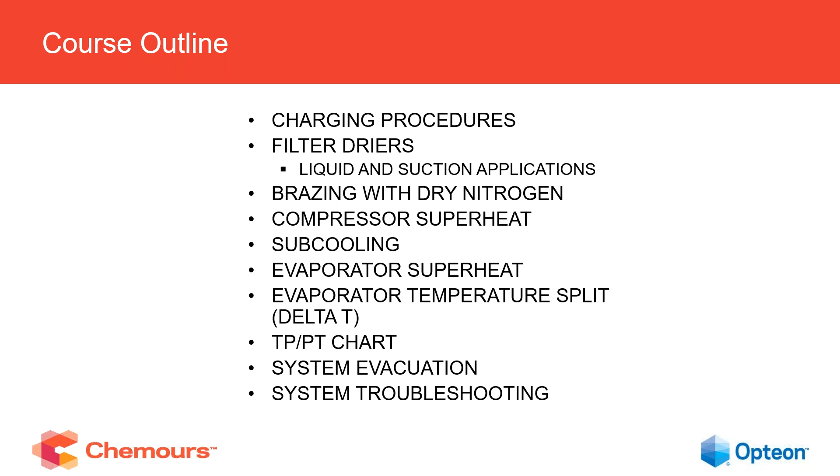So the new equipment, just like all new equipment, will come with a service manual. And it is critical that the technician understands the proper way to install this equipment, servicing some of the components, because they will be a little different than components that they're used to seeing in systems.

Most of these air conditioning systems will have sensors on them to sense the refrigerant, because it is an A2L refrigerant. They may or may not need PM, preventive maintenance, on those sensors—it will just depend on the equipment. They really need to understand the difference between an A2L refrigerant and an A1 refrigerant like 410A that they're used to using today.

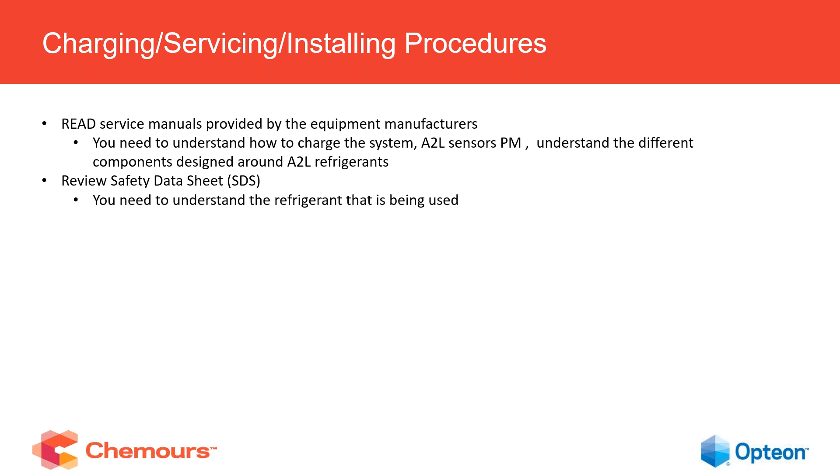They should always review the safety data sheet. Each chemical has a safety data sheet, so they need to review that. Luckily enough now, if they haven't reviewed a safety data sheet and they're used to an MSDS, safety data sheets are much easier to read today than the MSDS. They're all sectioned, each section is the same on each SDS now, so it's much easier to understand an SDS over an MSDS.

Just like any refrigerant, make sure there's proper ventilation, especially if they're working in confined spaces. A lot of these units will be in confined spaces, especially the air handler side. So never go into a confined space by yourself—always have a partner when you're working with any refrigerant, whether it be an A1 or an A2L refrigerant.

Recover the refrigerant in a properly rated and marked cylinder. The A2L refrigerants used in air conditioning applications will need 400 PSI cylinders, just like the 410A cylinder. Pressures are very close to 410A on the air conditioning side of the A2L refrigerants. So make sure they are properly marking the cylinder after recovery, what refrigerant they have recovered. That way there will be no mixing of refrigerants. You do not want to mix any refrigerants, especially an A2L into an A1 system.

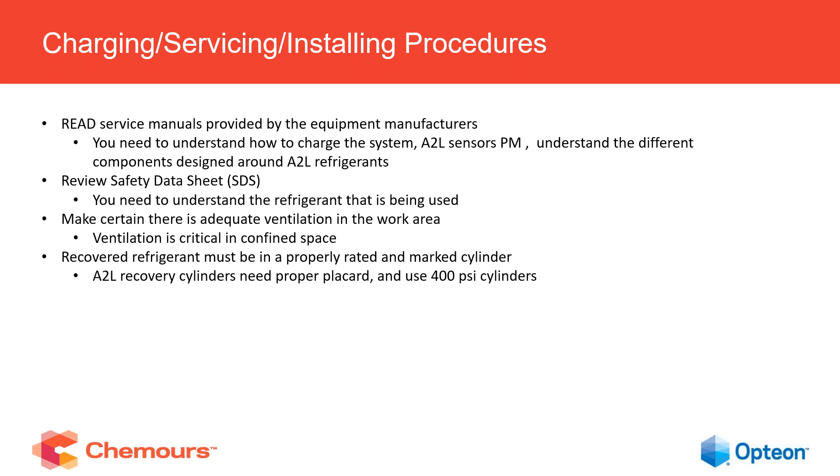Always purge with dry nitrogen. We'll be talking about dry nitrogen quite a bit. It will be in the instruction manual how the manufacturer wants that system to be brazed, but the technician will need to purge any component, any line set, anytime they put a torch on that system. They will have to have dry nitrogen flowing through the piping or component as they braze it in. This shouldn't be anything new—this should have been done with any other refrigerant. It displaces oxygen, it makes a lot better joint, and it's much safer.

If you notice a flame increase in size, color, that type of stuff, always turn the torch off, re-ventilate whatever you're brazing. Make sure all of that oxygen is displaced before you put the torch back on.

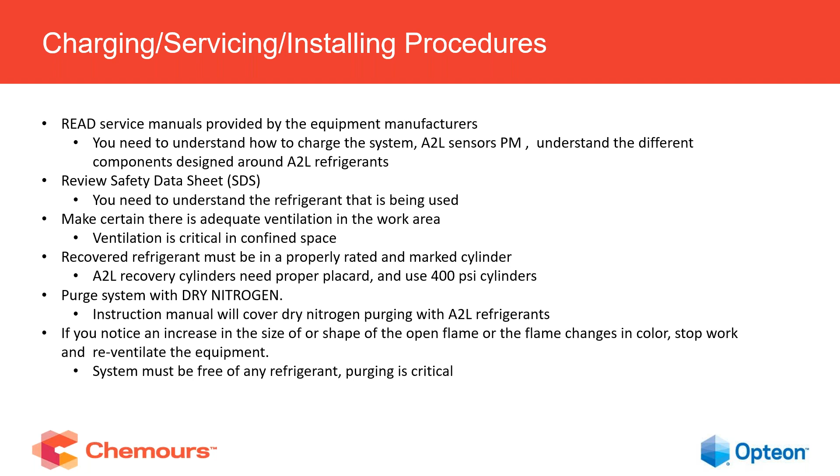System must be free of any refrigerants, so again purge is critical. Evacuate the system—again, different manufacturers want different micron levels. Industry standard is 500 microns, but as time goes on, some manufacturers have determined that they want it as low as 200 microns. Again, that will be all in the instruction manual, and they have the reasons why they want it down to 200. So it really needs to be pulled down to 200 microns if that piece of equipment they're installing wants it at 200 microns.

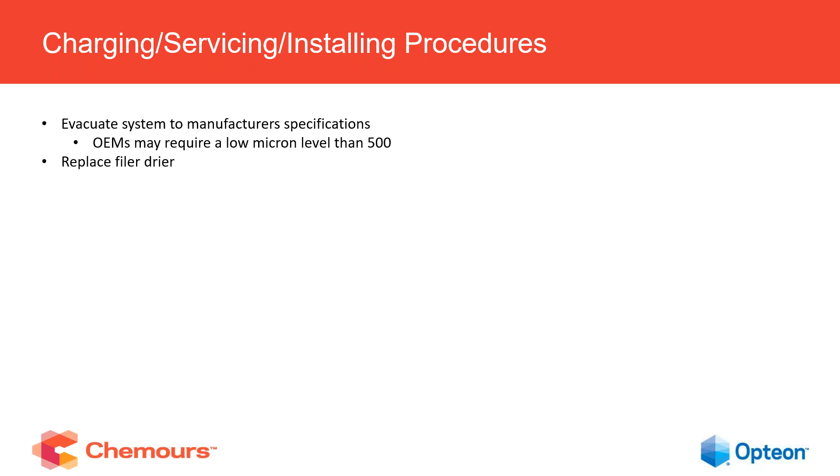Filter driers, again, this is nothing new here. Any system out there should have a liquid line filter dryer on it. Not all systems come with filter dryers new, so make sure before they leave wherever they're purchasing the equipment from that they pick up a filter dryer if that system does not have one from the factory.

Again, only braze with dry nitrogen. Make sure that everyone understands that dry nitrogen needs to be purged through these components, through the tubing, before a torch is put on the system.

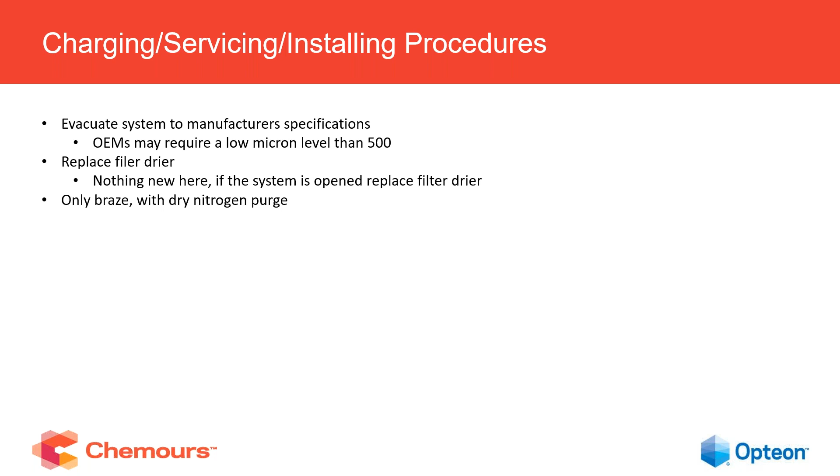So, weigh in the charge. Again, this isn't anything new, it will be in the instruction manual on line set lengths. Years ago, it used to be a 25-foot line set for the condensing unit before you had to add refrigerant. Now it's around 15 foot before you have to add refrigerant. The jury's kind of still out on the new equipment, what it will be, but bottom line is, it will be in the instruction manual. They will have a chart in there saying X amount of additional piping, you need to add X amount of refrigerant. So again, that's why it's very important to read and understand the charging guidelines.

Anytime that you introduce refrigerant to the system, whether it be topping it off, whether it be initially charging a system, or if you had to replace a component, that cylinder has to be inverted. Liquid refrigerant has to leave that cylinder. If the technician vapor charges, it will fractionate the refrigerant in the cylinder and fractionate the refrigerant in the system.

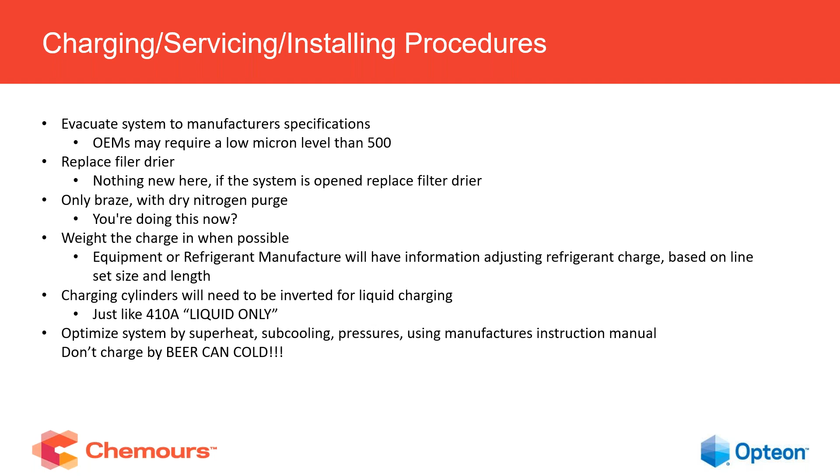All right, so let's move over to temperature pressure charts.

We'll talk about a temperature pressure chart first. Now, why I bring this up is typically air conditioning technicians do not use temperature pressure charts or pressure temperature charts. They typically use their gauge set because it has 410A, it has R22 on the gauge, the temperatures, and they've just always used that. Has it always been as accurate as it could have been? No. That's why a temperature pressure chart or a pressure temperature chart should be used. It's more accurate, and more than likely, if they're using analog gauges, the refrigerant will not be on the gauges anyway. So they really need to get familiar with how to read these charts. It's not rocket science by any means, but they need to understand how to read the charts.

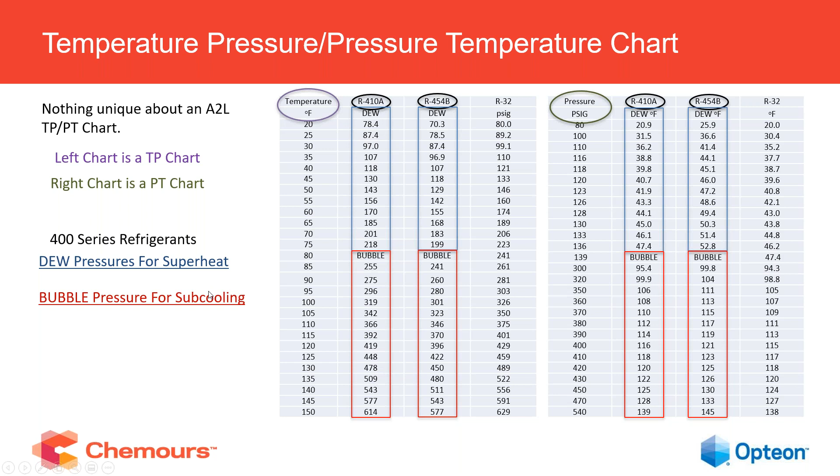Now on these two charts here, as you can see, the dew pressures are in the lower temperatures for superheat and in the higher temperatures for subcooling. But they may come across pressure temperature charts or temperature pressure charts that have bubble and dew columns side by side. That's where it gets confusing. So they really need to understand that bubble pressures are for subcooling and dew pressures are for superheat.

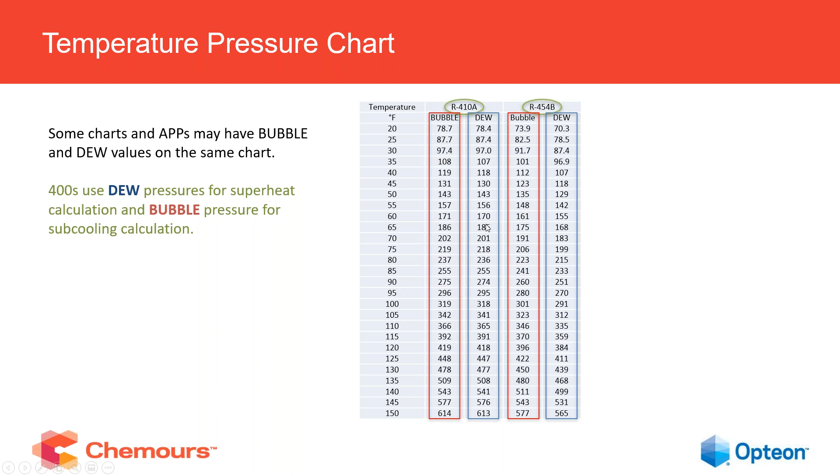They don't read the inside dial that has temperatures of the refrigerant. The pressure we'll use, for example, is 150. So on your pressure temperature chart, 150 pressure equals different temperatures depending on what refrigerant is in the system. For 454B, which will be a very common refrigerant you'll be dealing with, versus 410A, there's a difference in temperature. That's why it's critical to use a pressure temperature chart rather than the temperatures on the dial of the gauges. They cannot use 410A temperatures to charge a 454B system.

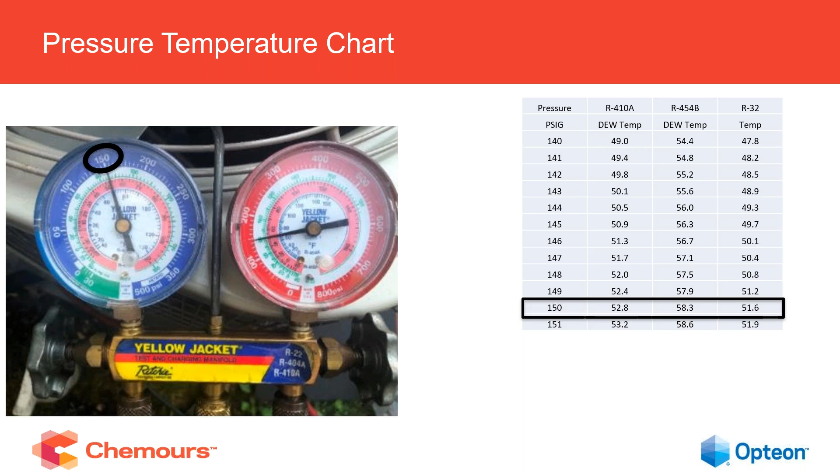If they have digital gauges, that will be in the program. It will have the pressures and temperatures programmed in. Now, not all digital gauges will have 454B, for example, in it. So if that's the case, they can take it back to the supply house and have it reprogrammed for the new refrigerants. It just depends on the age of the digital gauge set.

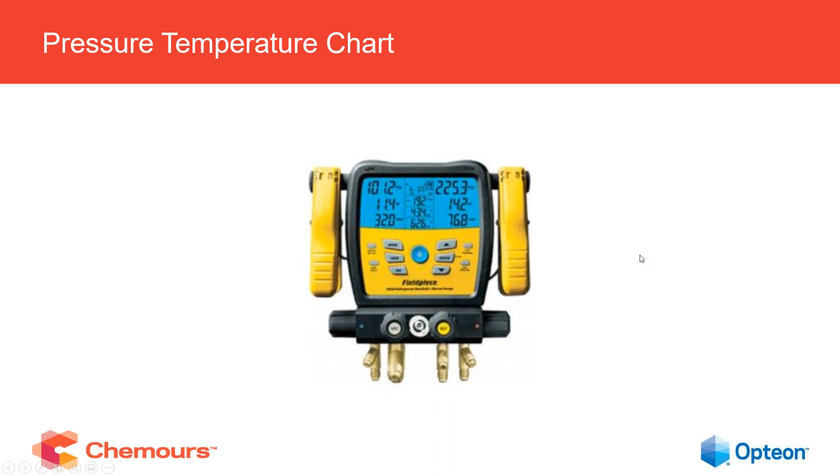So this is more on the service side. These systems, after installed, will need service, whether they have leaks or for different reasons. The technician will have to put a torch on it every once in a while, and again, they need to purge the system before they put that torch on there. Leaks in a coil, leaks on tubing, expansion valve change out, filter drier change out.

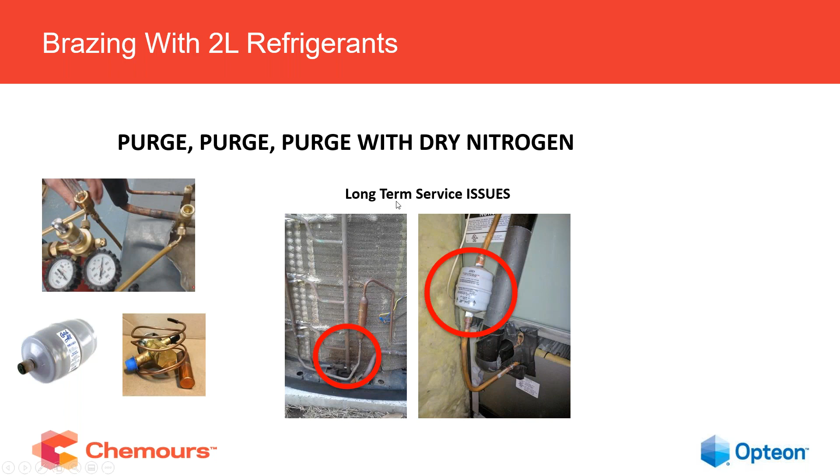Filter driers. First, we'll talk about liquid line filter dryers. As I mentioned in the beginning, if the new piece of equipment doesn't come with a filter drier, make sure that the technician gets one before he starts to install a piece of equipment. Anytime that equipment is serviced, anytime it's opened up to atmosphere, a new filter drier needs to be replaced.

Filter driers are in systems to trap moisture and contaminants, and anytime that system is opened, you will introduce moisture, and depending on what the component failure was, you could have contaminants floating around in the system. You should never unbraze a joint, whether it be a filter drier, a compressor, or any component - it should always be cut out. You don't want to put a torch on a component, especially a filter drier that has high moisture levels in it. Once you put that torch on there, that moisture is going to go back into the system. So it's always best to cut out the component.

Again, after the component is replaced, the system will need to be pulled down to the micron level that the manufacturer wants it to be. For example, on a residential unit, you blank off the vacuum pump and let it sit there for 20 minutes or so. If the micron level rises and levels off, that means you're leak free, but you still have moisture in the system, so you need to change the oil in the pump and re-evacuate again. But if it holds steady for 20 minutes or so, you know you're leak free and moisture levels are low, and the system can be recharged and started again.

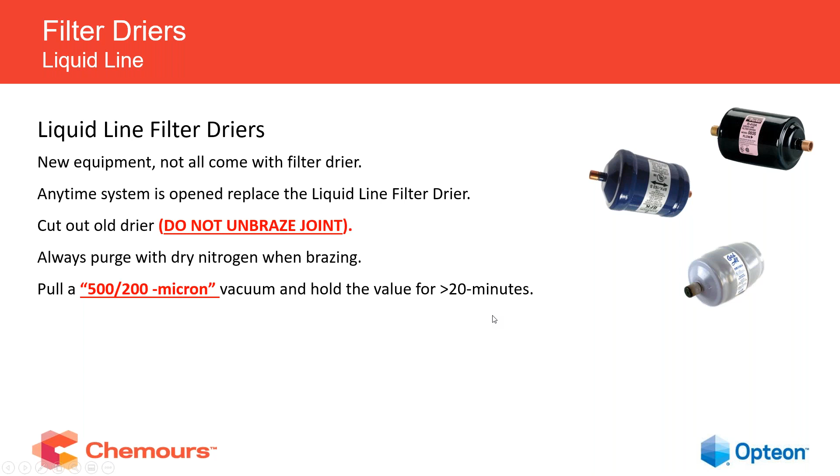Now, some of these systems - suction filters will not come with the systems. Suction filters do not need to be installed initially, but if the system had a compressor burnout, that's when a suction filter will need to be installed. Suction filters are not designed to stay in the system long term. They are designed to clean the system up, and after the cleanup, they need to be taken out.

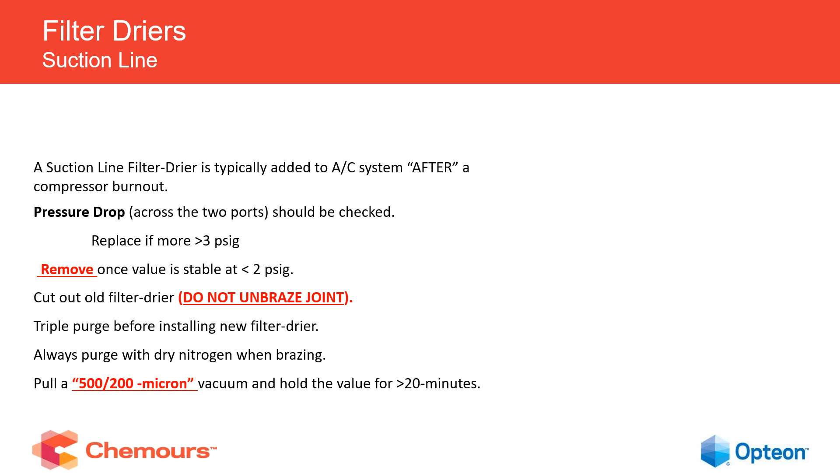Now, on an air conditioning application, let's say you had a burnout, you installed a suction line filter drier and a liquid line filter drier, and got the system up and running. That suction filter needs to be monitored the first hour of runtime. All contaminants will come back to it very quickly. So when you exceed a 3-pound pressure drop across that suction filter, it needs to be replaced again.

And then monitor it after the system's cleaned up, cut out the suction filter, put a tubing in, and you'll be good to go. So what will happen if that suction filter is left in the system long term and you exceed that 3 pounds of pressure drop across it?

You will burn up that compressor. Compressors are cooled by refrigerant coming back to it. So if you have a pressure drop across the suction filter, or the suction filter is restricted, you're not getting enough cool vapor back to the compressor, and it will prematurely burn up.

This isn't something that's going to happen overnight. Compressors are pretty tough. It may take a month, it may take a year, but bottom line is you're not going to get the life out of that compressor that it was designed for.

So suction filters need to be monitored. They need to be taken out after the system is cleaned up. And again, you need to purge with dry nitrogen. You need to pull that system back down to 500 to 200 microns, depending on manufacturer. Again, let it set for 20 minutes. If you don't have any leaks, if it doesn't rise, you're okay.

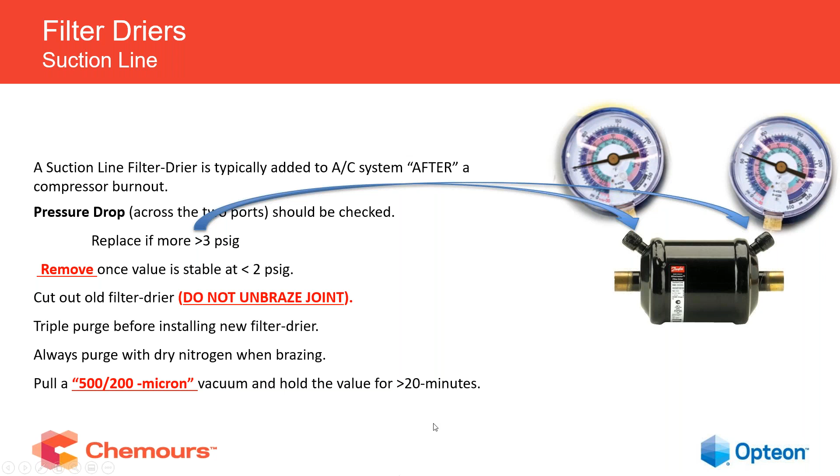So I'll talk a little bit about compressor superheat now.

Typically, these new systems will come with expansion valves on the evaporator side, but manufacturers get pretty creative. So to meet SEER ratings, they may or may not be able to use pistons. Just depends on manufacturer. But if these systems have pistons in them, more than likely it will need to be charged by compressor superheat.

Now, it is critical that the technician uses the right piston for the refrigerant. So depending on what that system's refrigerant design is, would depend on what orifice needs to be put in that system. So make sure they are using the right piston for the refrigerant in the system.

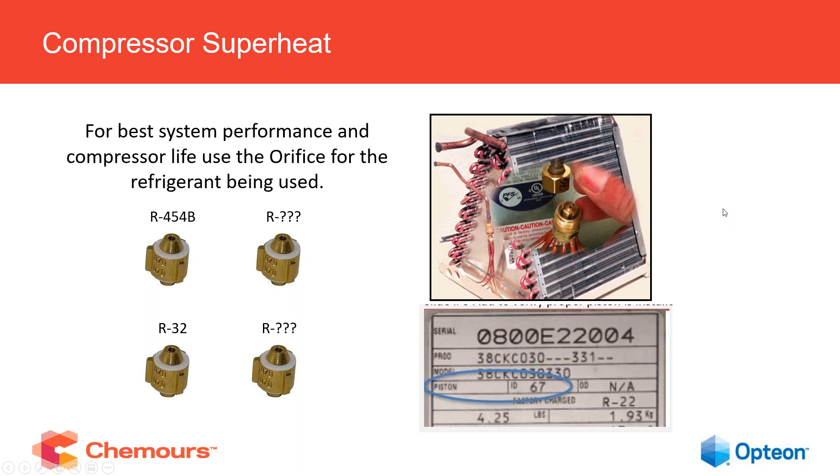So how do you check compressor superheat? Well, you'll need some tools. If they've been charging R22 or R410A systems with pistons in the past, hopefully they have a digital psychrometer or a sling psychrometer now. If they don't, they need to purchase one. Both are very good, both are very accurate, both are tools, so both of them need to be taken care of, and they'll last a long time.

So you get the indoor wet bulb temperature. It needs to be as close as it can to the air handler. If you can get it inside by the air handler, that's the best place, but typically if they get it at the closest return vent to the air handler, that's okay.

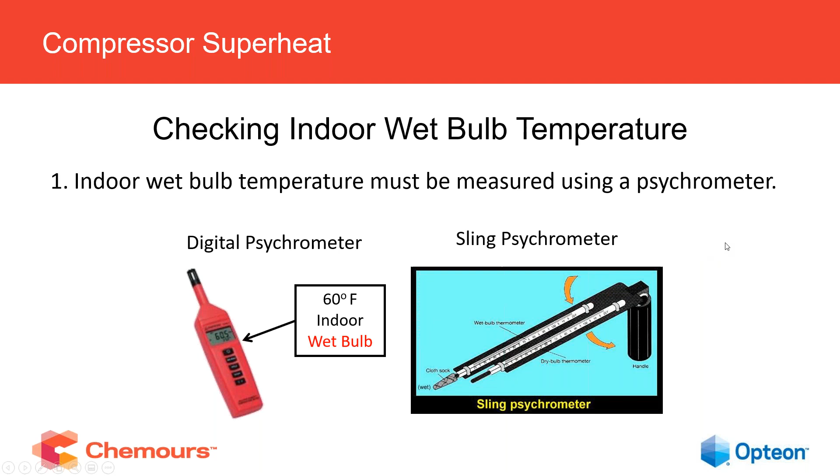The example here, we're going to use a 60-degree wet bulb temperature, and then they will need to get an outdoor temperature. And when I say outdoor temperature, I don't mean their cell phone. They need to get the temperature entering the condensing unit, the outdoor condensing unit.

If there are multiple condensing units in the space, this is a good time to check to make sure they're not getting recirculated air from other condensing units. Example, if it's around 80 degrees ambient and they're getting 100-degree readings entering the condenser, more than likely they're recirculating from another condensing unit or from this condensing unit. So that's a good test there.

But normally, just a good temperature entering that condensing unit is okay. So on this example, we're going to use an 80-degree outdoor air temperature, or dry bulb temperature.

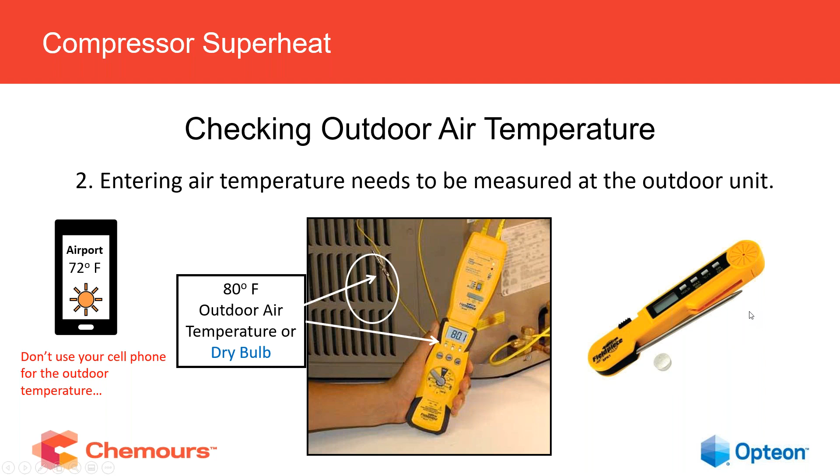So this is a generic superheat chart. They can download this off of Google, or if they're using the R22 or 410A slide charts, they can still use that slide chart to get the superheat. They just can't use that slide chart for pressures with the refrigerant that is in the new piece of equipment.

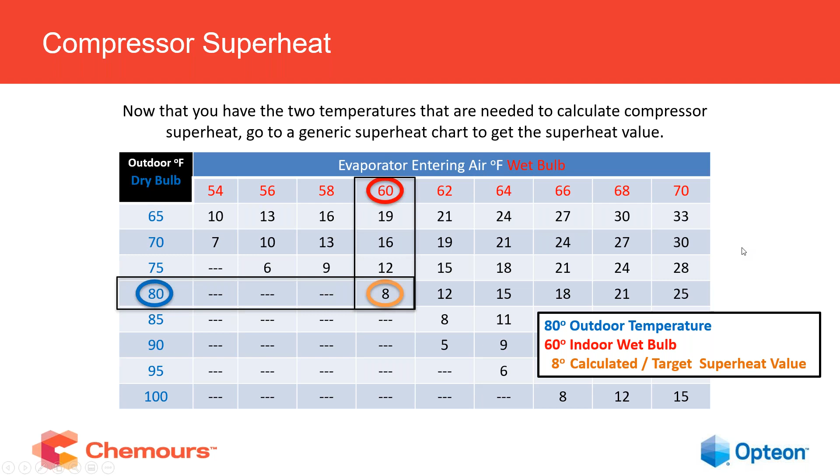So remember, we have an 80-degree dry bulb and a 60-degree wet bulb. That intersects at an 8-degree target superheat. As you can see here, superheat can vary from 33 to 5. So that's why it's very critical to get the target superheat to properly charge the system. So we're shooting for 8 degrees of superheat.

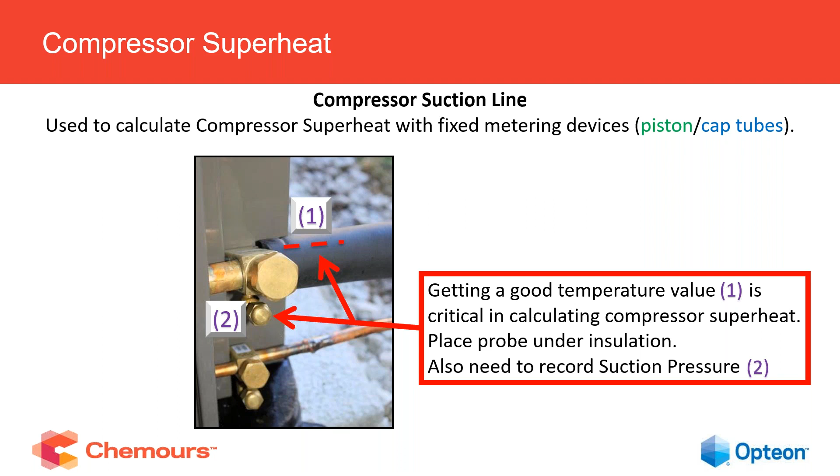And where do they get the measurements from? They get their temperature underneath the insulation, and they get their pressure at the service valve on the suction side. So again, they need to get the pressure temperature chart.

And the example we'll use is 107 pressure on the gauges. Go down to 107 pressure, go to the left on the temperature pressure chart, and that gives you a 40-degree refrigerant temperature, or saturated gas temperature. Underneath the insulation, we were reading 55 degrees.

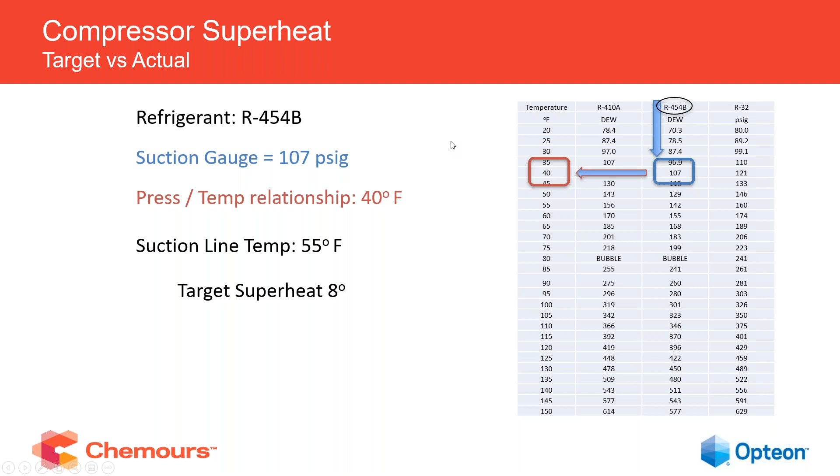And remember, we're shooting for an 8-degree target superheat. So the 40 from the 55, that gives you a 15-degree actual superheat. So your superheat is high, so that means you need to add refrigerant.

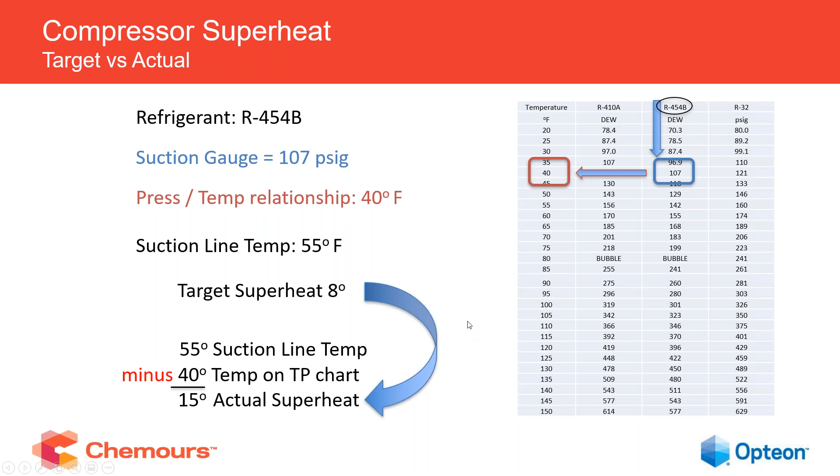Now, when you're adding refrigerant, you need to let the system stabilize for a minimum of 20 minutes. The longer that system runs, the more stable it's going to get, the better readings you will get on your superheat.

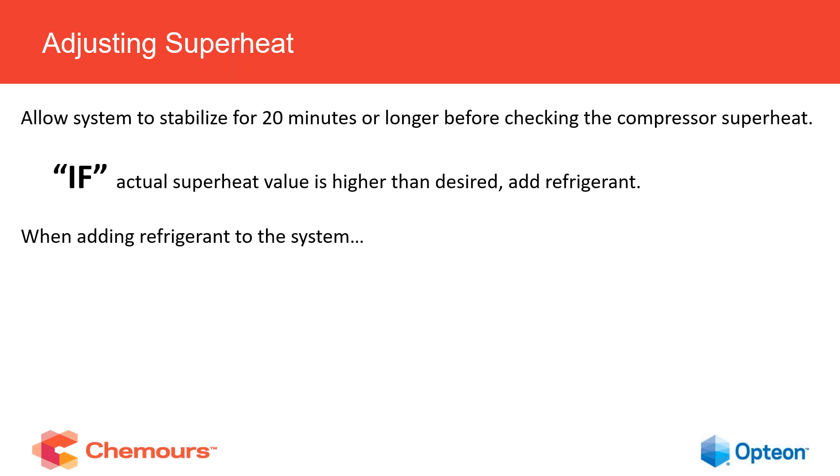So when you add refrigerant, again, it needs to be added as a liquid. The refrigerant cylinder needs to be inverted or turned upside down.

Just add refrigerant slowly into the suction line. Make sure the compressor is running. Throttle the manifold open and close. You won't get any refrigerant into the compressor if you do that. It's a very safe way to do it.

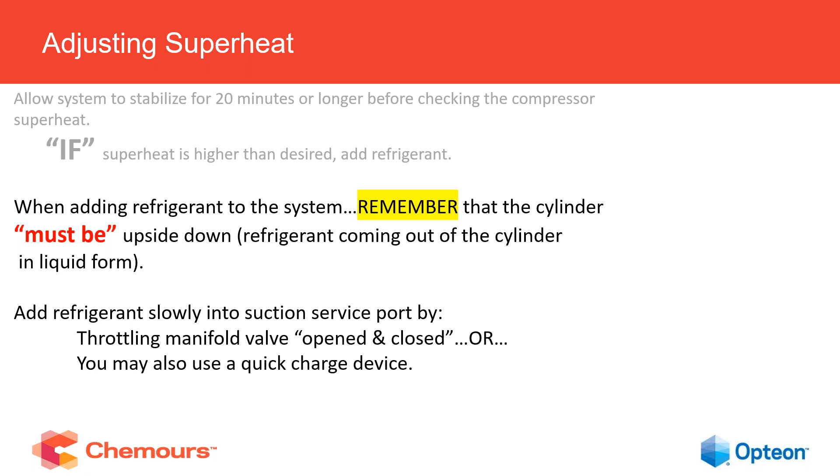Add refrigerant in 5% increments. Again, anytime you add refrigerant, you need to let the system get stable again. Let it run for at least 20 minutes and then check your superheat. And if you need to add more refrigerant, do it again.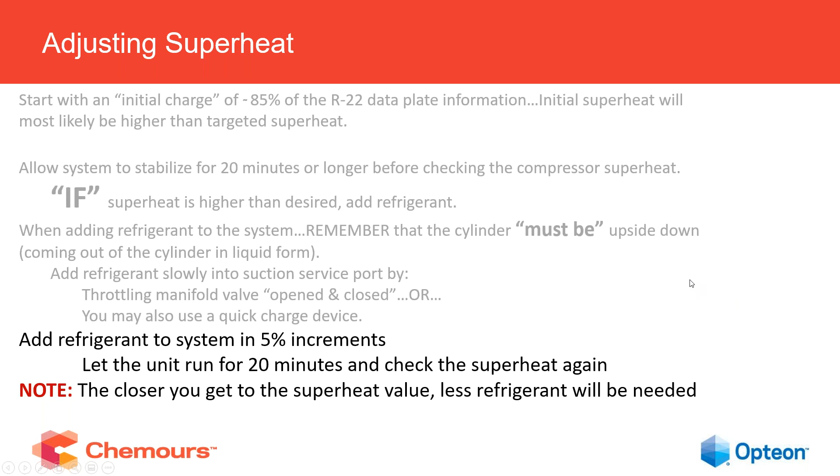But remember, the closer you get to that target superheat, the less refrigerant that system will need. So if you started out adding 3 pounds, let it run, you may only have to add a half pound the next time. So it's very easy to overcharge systems. Be extremely careful, because it's a lot easier to add refrigerant than to take it out.

Okay, so now the system has an expansion valve. And like I said earlier, most of these systems will come with expansion valves. The expansion valve typically is a non-adjustable valve. So that's why it is very important to get the subcooling at design temperatures.

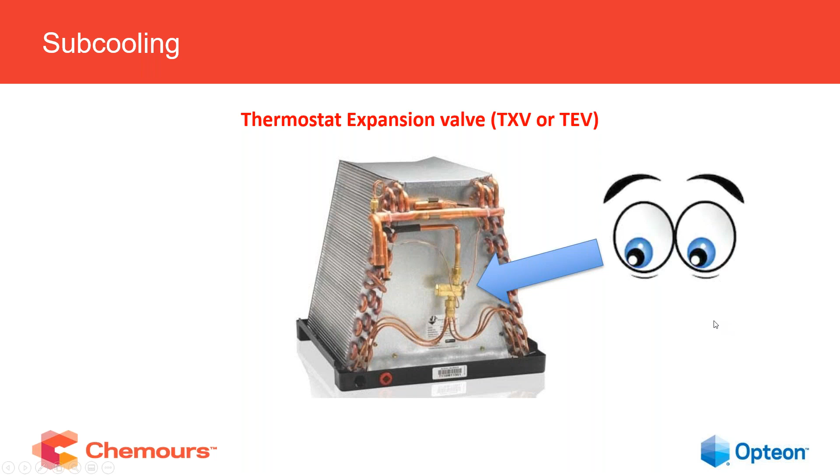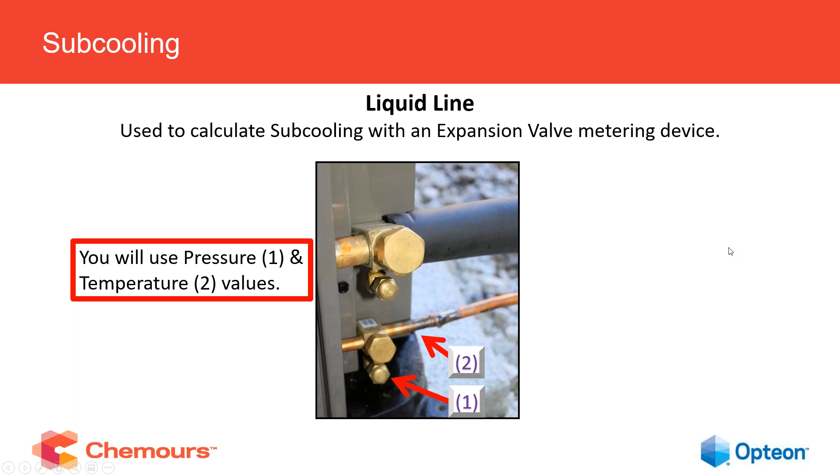So subcooling is on the liquid side of the condensing unit. You get your temperature on the liquid line, and you get your pressure at the liquid service port. Again, go to your temperature pressure chart with 454B. We'll use 300 pounds of pressure, and that equals 100 degrees saturated gas temperature, or refrigerant temperature.

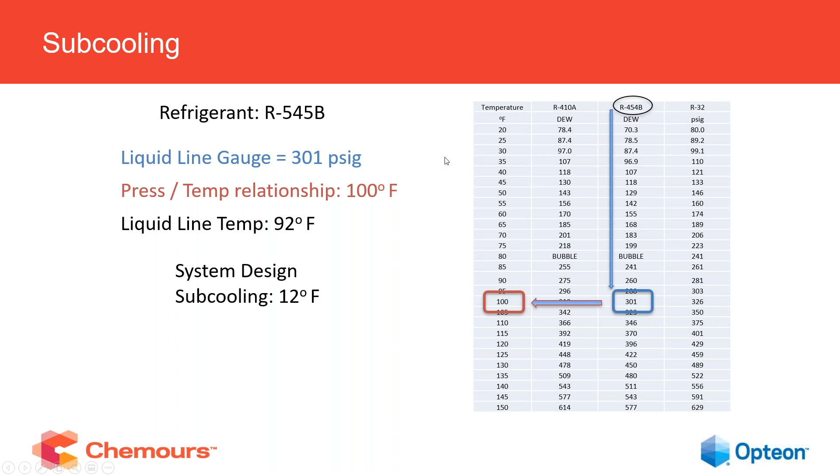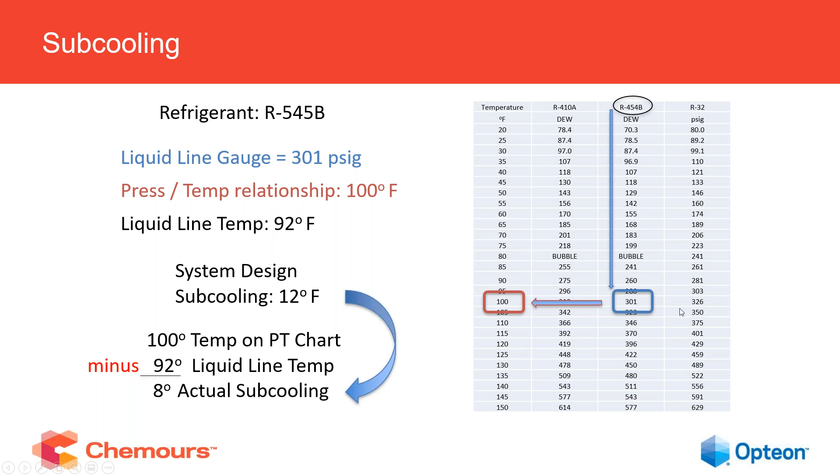And the surface temperature was reading 92 degrees. Remember, on this example, we'll use 12 degrees of subcooling as the design subcooling. So you take your 92 from your 100, and that gives you actually 8 degrees of subcooling. So when the subcooling is low, that means you need to add refrigerant.

So again, you need to let it stabilize. You need to add liquid refrigerant to the suction side. Again, just throttle your manifold, open and close, take it easy.

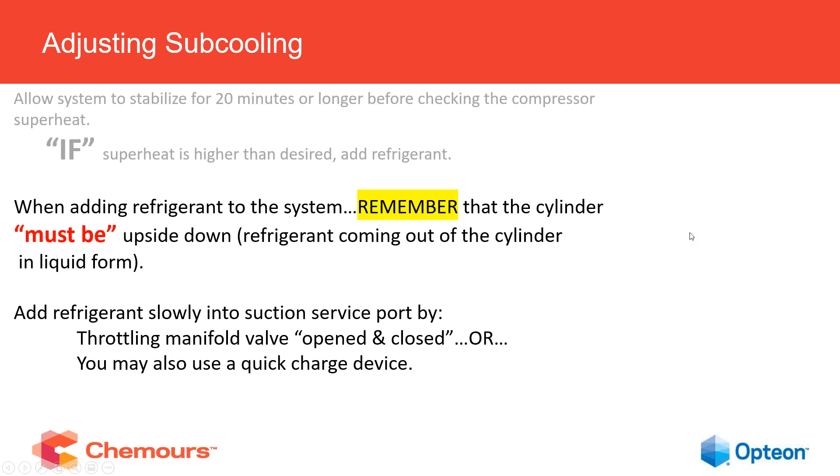Let it stabilize, add refrigerant in 5% increments, and subcooling is not as critical as superheat, but you need to be within a couple degrees of design subcooling. If you're over the subcooling, that system will use a lot more energy than it's designed for. So that's why it's best to get within a couple degrees of subcooling.

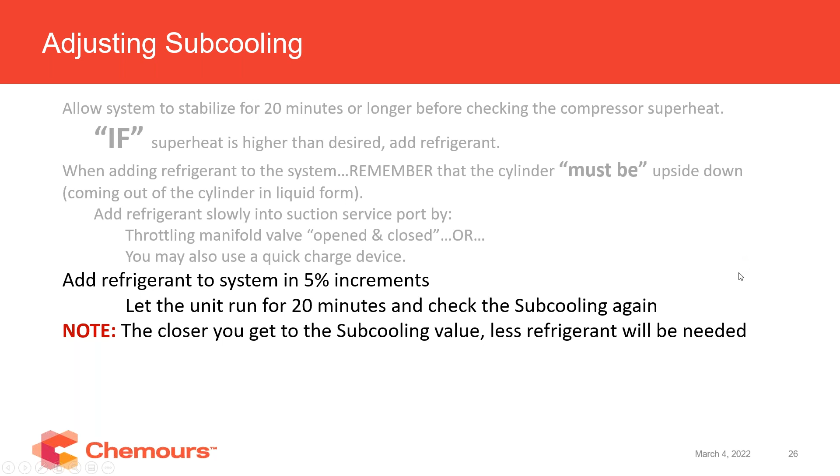The higher the SEER rating, the lower the subcooling will be, because the surface area on the condenser is a lot larger, and the pressures will be a lot lower. So if you're overcharging a high SEER system, at the end of the month, the customer may have the same utility bill as they did with a lower SEER unit. So that's why it is very important to be within a couple degrees of subcooling, high or low.

And that will be in the instruction manual, how to properly charge the system. Each manufacturer will have a little different way of charging the system. So make sure the technician understands how to properly charge that system.

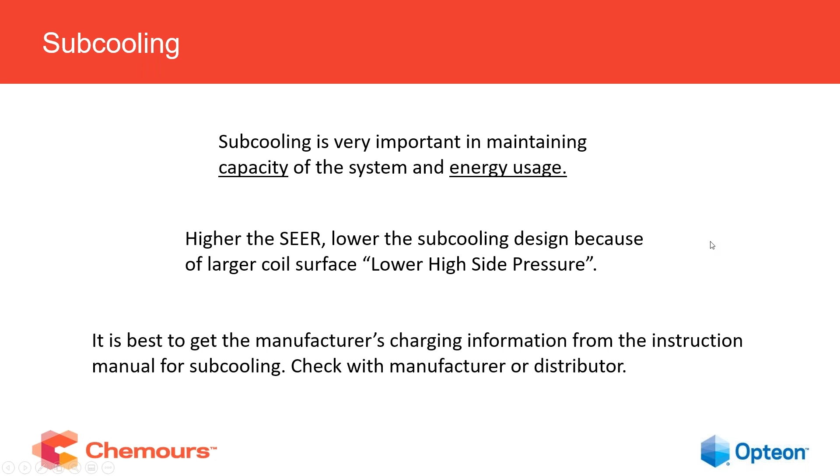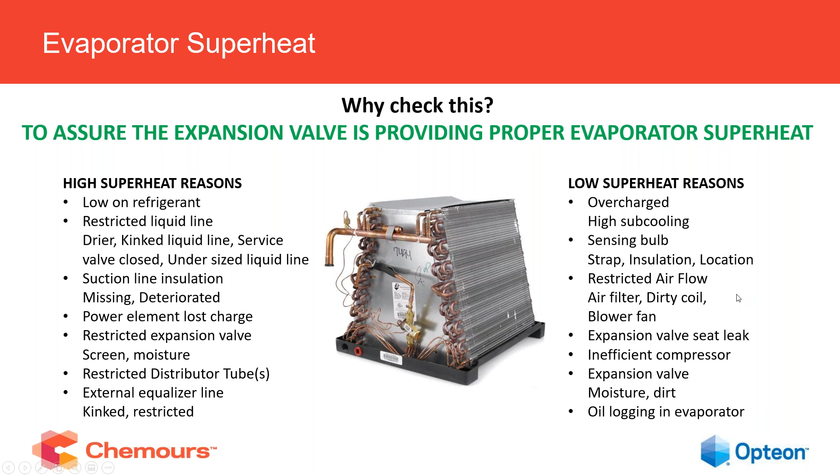Expansion valve seat leaking through will give you low superheat. An inefficient compressor will give you low superheat. Expansion valve moisture, dirt in the expansion valve keeping it open, will give you low superheat, and oil logging in the evaporator. So these are just some of the reasons why you would have high or low superheat, and that's why you would want to check the evaporator superheat. This is only done on expansion valve systems, not on fixed orifice or a piston.

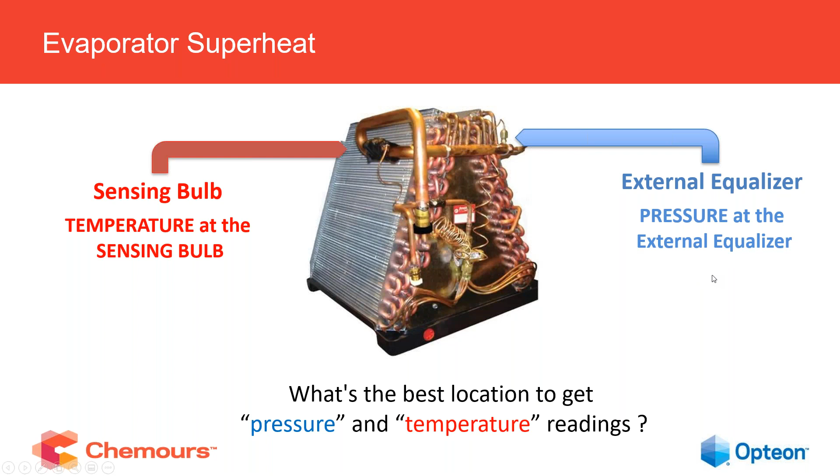So where does the technician get the pressures and temperatures? Well, the best place is at the external equalizer line, and the best place is at the sensing bulb. Now in the real world, this can be tough to get, especially pressures. So get pressures as close as you can to the expansion valve, and temperatures as close as you can to the expansion valve. Real world versus what really needs to be done sometimes isn't feasible, and I understand that - anybody who's worked on systems can appreciate that. But the two best places are the sensing bulb and the external equalizer.

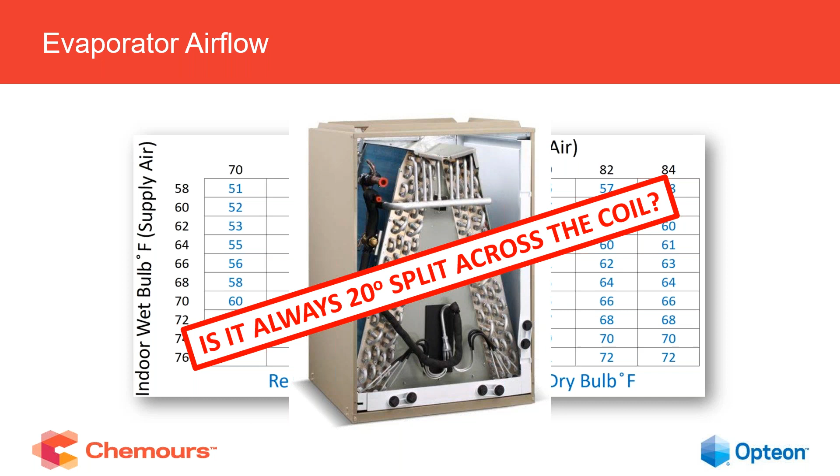Okay, airflow across the indoor coil. Now for whatever reason, most technicians think they should have a 20-degree split across that indoor coil. That's from supply to return air temperature, or delta T is the proper term for it. Now a 20-degree split across that coil can be achieved, but typically it's different.

So the example here is just a normal day. You've got a 62-degree wet bulb temperature, a 76-degree return air temperature, and that coil should be around 56-degree air temperature. So that does give you a 20-degree split.

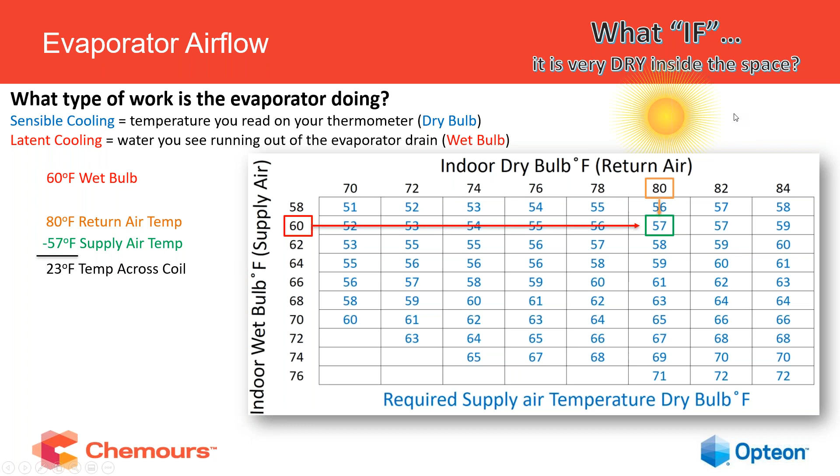And if the technician is charging it by a 20-degree split across that coil at the wrong conditions, he will either overcharge it or undercharge it. And again, these are generic charts. Manufacturers have these charts available, and technicians really need to understand what the temperature split should be across the indoor coil at different conditions.

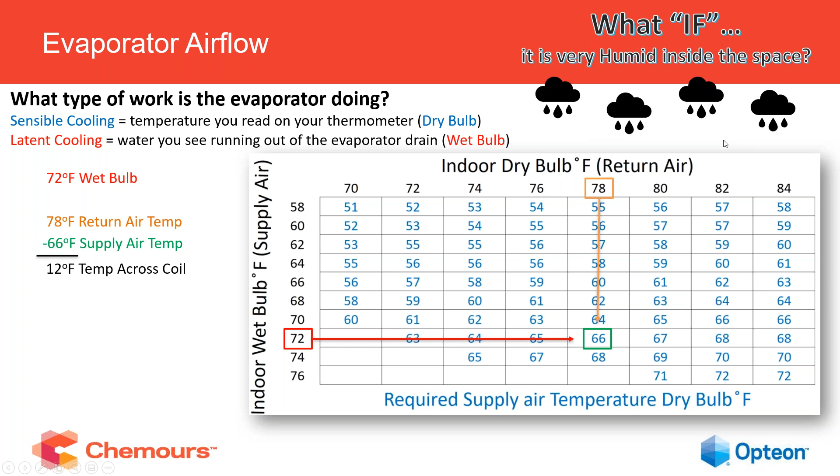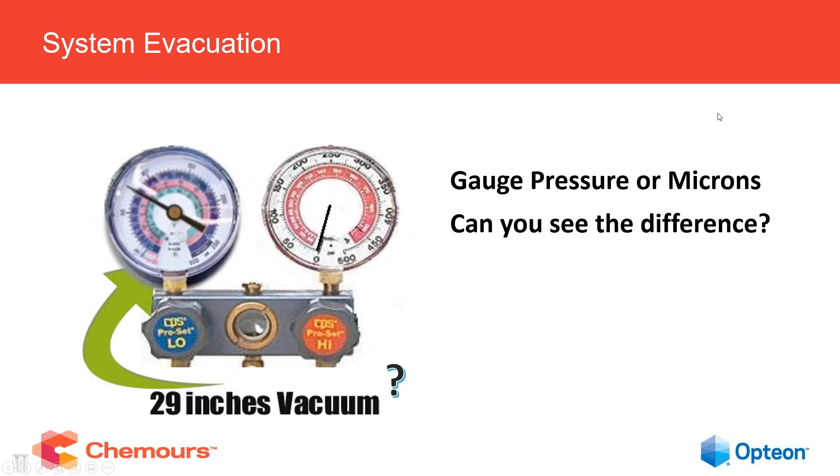All right, so system evacuation now. Pulling a vacuum on the system is very critical, especially on new installations and when you're replacing components. Compound gauges were never designed to be used to measure micron levels. For example, on your compound gauge, 29.14 inches of mercury is 20,000 microns, and 29.91 inches of mercury is 200 microns. So that is very difficult to read on a compound gauge.

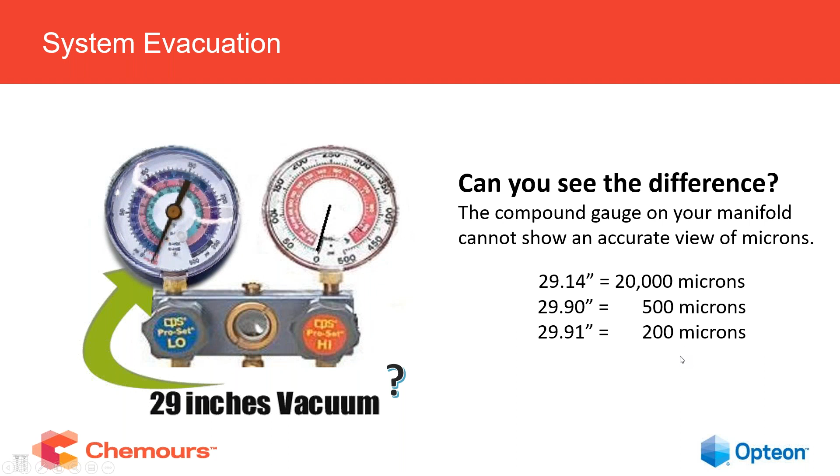So what you need is a micron gauge. Hopefully you have one now. Micron gauges are very accurate - the digital ones are very good nowadays. If you still have the analog type and they're working properly, there's nothing wrong with it. Again, they're tools, they need to be taken care of. Keep oil out of the sensors - that's typically why micron gauges fail, because the oil gets into the sensors. So take care of them, keep them clean, keep them oil-free. They'll last a long time and really help you out on how to properly read micron levels.

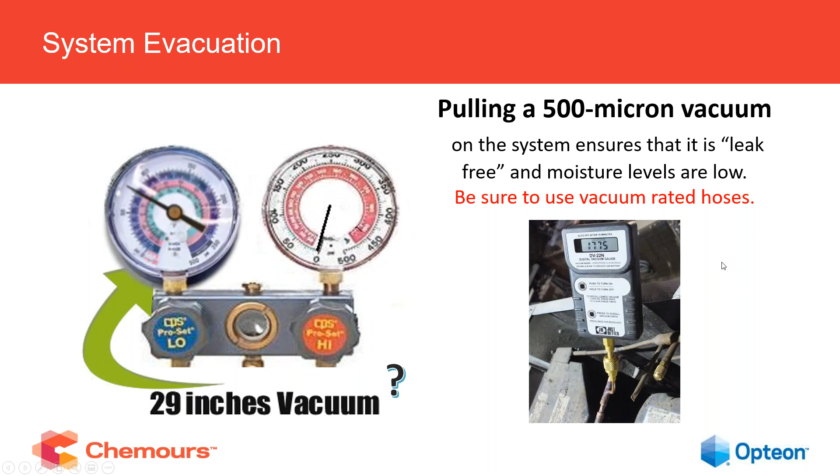When they put their gauges on, liquid pressures both will be low, suction pressure both will be low, subcooling both will be low. But the big difference is the superheat. Undercharge, you'll have high superheat. Low airflow, you'll have low superheat.

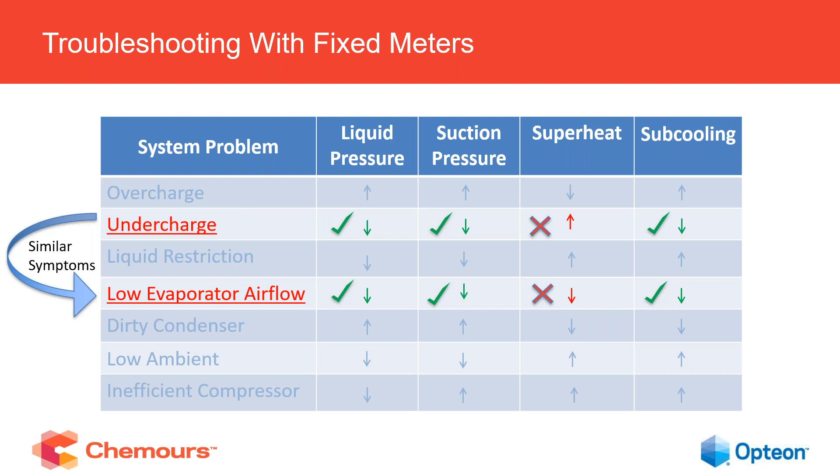Technicians going out, servicing the system or doing their PMs, they throw their gauges on there. They need to check superheat and subcooling before they add refrigerant or take refrigerant out. Because if a system is undercharged and they add refrigerant, or if the system has low airflow and they add refrigerant thinking it's undercharged, they'll get liquid refrigerant back to the compressor. They can tell this by checking the superheat. Again, undercharged, you'll have high superheat. Low airflow, you'll have low superheat.

So again, staying with the fixed metering device system, let's talk about undercharged versus low ambient charging. Both your liquid pressures will be low, both suction pressures low, superheat both will be high. But subcooling, undercharge will be low, low ambient will be high.

I get a lot of tech calls in the spring, and this is the scenario. They think the system is undercharged, but it's low ambient conditions. Technicians really need to let the temperature get above 70 degrees stable before they start taking pressures and temperatures on a residential unit. Because if it's low ambient but they think it's undercharged and put refrigerant in, when ambient temperatures start to rise, either they'll get liquid refrigerant back to the compressor, or it'll go off on high head pressure, depending on how much refrigerant they've added.

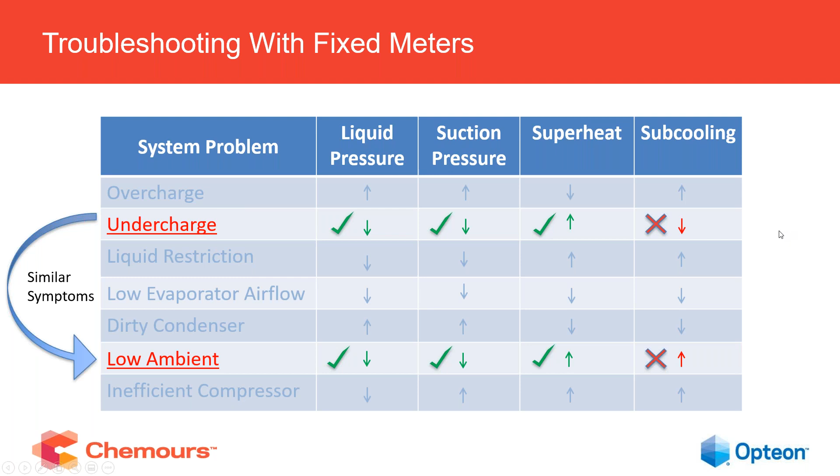Again, this will all be in the instruction manuals. Depending on manufacturer, they'll have minimum charging ambient temperatures.

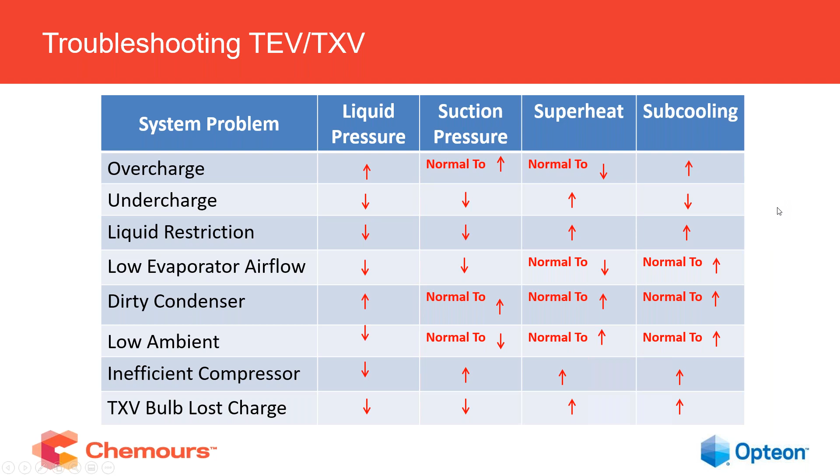So now let's do some troubleshooting with a system that has an expansion valve. We'll use overcharged and dirty condenser as the example. Both liquid pressures will be high, suction pressures will be high, subcooling will be high. Big difference in the superheat: overcharged, you'll have low superheat; dirty condenser, you'll have high superheat.

So again, if the technician just puts these gauges on there and is not checking superheat or subcooling, he could take refrigerant out because he thinks it's overcharged, when all it is is a dirty condenser, or vice versa.

So now we use undercharged, and the expansion valve sensing bulb has lost its charge. Whether it's rubbed a hole in the capillary tube going to the sensing bulb, or the bulb itself has lost the charge for whatever reason, there's different reasons why the power element loses its charge, but there's a big difference between undercharged and a bulb that's lost its charge.

Liquid pressures both will be low, suction pressures both will be low, superheats both will be high. But subcooling: with an undercharge, you'll have low subcooling, and if your expansion valve sensing bulb has lost its charge, you'll have high subcooling. The suction pressure may even be in a vacuum, depending on the valve.